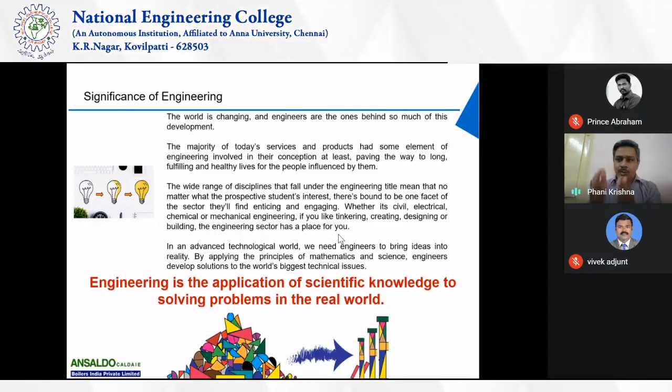So you can see one small pictographic image in my slide here, where there is so much of ideas - you can see the triangles, rectangles in this one. And when we put it into small vertical portions, beautifully constructed into a vertical structure, that can be done by an engineer. You can see how I want to present the concept of engineering to you.

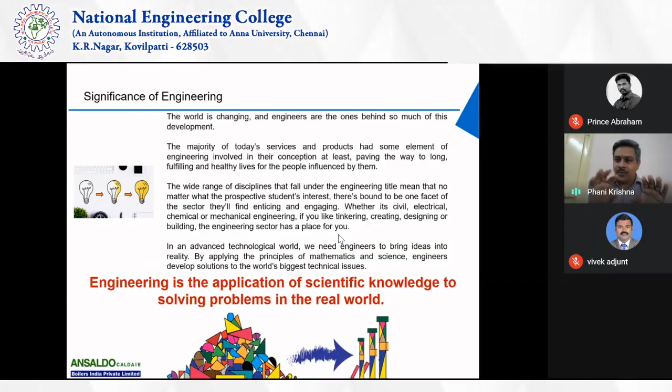Science and engineering - many people are familiar with the very big scientist in the world, Albert Einstein. Once he said: scientists investigate that which already exists, but engineers create that which has never been. You should appreciate this fact.

Take science - if you have electromagnetic radiation, there will be a lot of studies and research done by scientists. But the development of a radio, a TV, or high-class monitors, and how people communicate with each other using these kinds of devices, are built by engineers. So the concepts which are all transformed into realities are maintained only by the engineers.

The engineering portfolio knows no bounds - in the sense there are a vast number of facilities and options available in engineering based on students' own interests. But all these people are working toward a common goal, which is building a sustainable world - a world where all human beings living with nature will have harmony and balance.

Our engineering dedication - nothing compares to the knowledge that you have achieved something that impacts people's lives for the better. That is why engineering is so important in everyone's life.

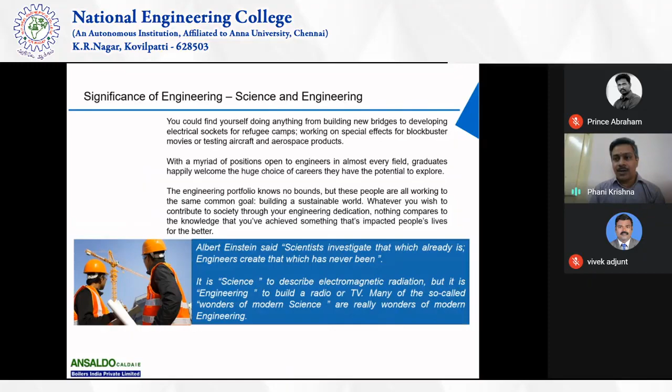Now, what is the impact of engineering on society? In fact, engineers have completely changed the world we live in - from modern homes, bridges, space travel, cars, and the latest mobile technology. Everywhere, everything we see around us, what we hear, listen to, feel, smell - the fragrance we experience - everything is related to engineering. Everything is built by engineers.

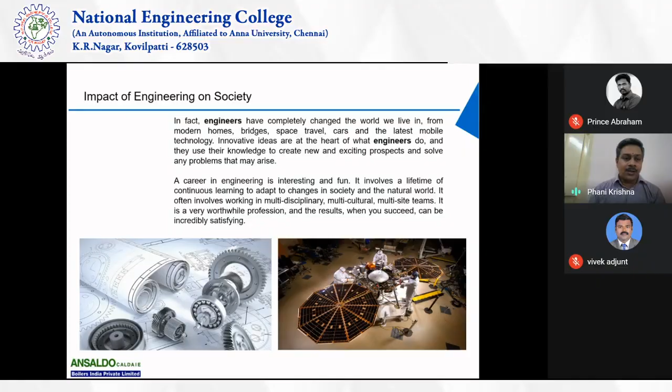A career in engineering is interesting and fun. It involves a lifetime of continuous learning to adapt to changes in society and the natural world. It often involves working in multidisciplinary, multicultural, multi-site teams. What does that mean - multicultural, multi-site, and multidisciplinary?

A small item cannot be built by only one person. It takes a team of people to come together, and then the concept of this idea comes into reality. That means a large number of people join as a team. Everybody may not know everything - some of us have some ideas, some experience, some knowledge. Someone will have additional knowledge which we don't have. So all these people come together and make things happen.

That is engineering - when we work in such an environment, we have a lot of interesting experiences. We know each other, we know many people, and many different kinds of understanding develop between each other.

Multicultural in the sense that as an engineer, we have a lot of opportunities to travel to many countries and cities across the world - to work in their systems, their projects, to train in their designs, concepts, and factories. While working and traveling to their countries, or while they come to our country, we have a lot of exchanges between ourselves and get to know each other a lot. That is how cultural development between people happens.

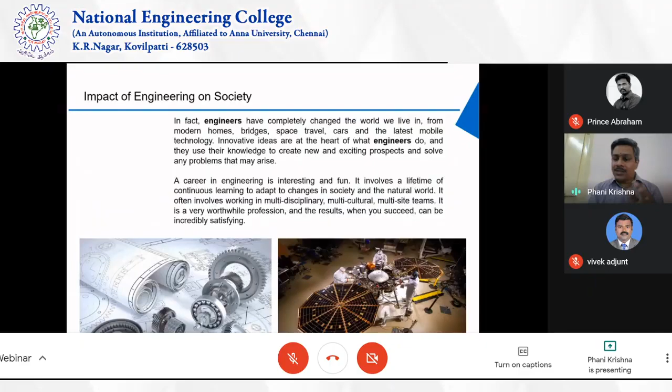In the previous slide we saw the impact of engineering on society, and now we will look at a few lines about why engineering is important to society. Earlier we saw the impact - now we will see why engineering is important.

Engineering is a field in which scientific knowledge and mathematics are used and applied to develop ways that benefit mankind, making it extremely important to society in several reasons. There are a lot of issues and problems that we have adopted and live with in daily life. When we have engineers around us, with good thinking and a development background in engineering, we can find solutions. We can give solutions, we can find solutions - we can provide those solutions because of engineers.

Engineering encompasses a whole range of industries that could include on-site practical construction work as well as evaluating safety systems from an office. They use the knowledge they have within a specific industry in order to make things work and solve problems, whether this be transport, medicine, entertainment, space, or environment. Wherever, whatever, and whichever point you take it, engineers must be available to solve their solutions.

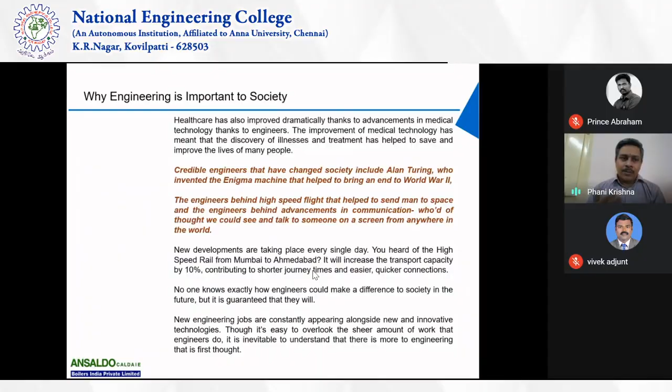In this technological age, the use and effects of engineering have become more and more apparent in our everyday lives, from our cell phones to the use of advanced transportation around the world, elucidating the growing dependency on the creative development work done by engineers.

This dependency on engineering dates as far back as the Roman Empire, as there was a great need of engineering to make lavish temples, structures for emperors, or walls for protection from outside threats.

The use of engineering in today's world has come with positive effects, as we are able to live comfortable and pleasant lives due to the advancement of building techniques and technologies created through engineering.

One of our big temples, the Tanjore big temple, temples in Bangalore, or big temples on the north side, or big churches - consider how they were built, and the engineers behind that.

Even though we didn't have the high technologies we have today, in earlier times they developed their calculations and put them into practice, building such beautiful, magnificent structures, which have all become identities of our country in the world because of the engineers.

Engineering has many names and different forms, but each branch holds positive effects that benefit human society and the world.

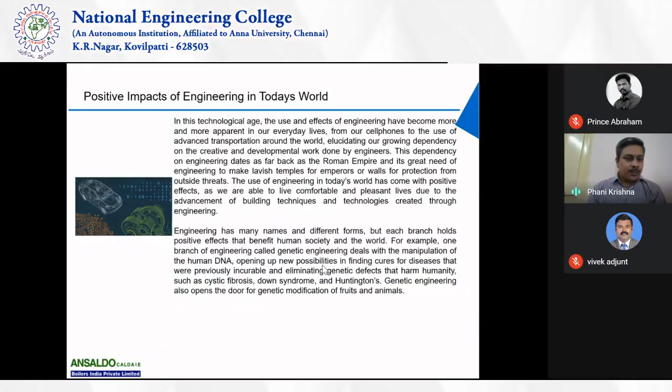And Huntington's disease. Genetic engineering also opens the door to genetic modification of fruits and animals.

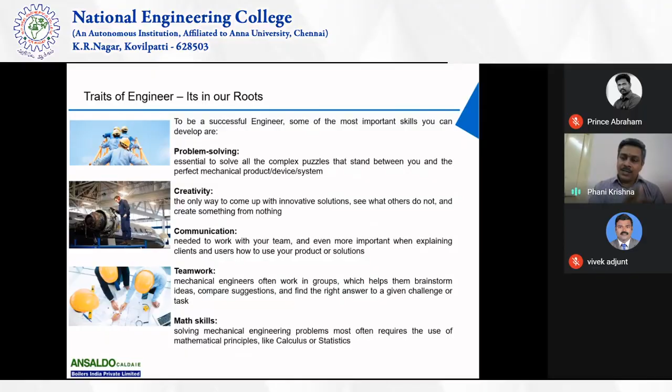Now, start now itself - it is in your hands. Start gaining experience as an engineer early. But you know what employers value even more? That means before graduation completes itself, employers - the job providers - expect some experience, hardcore hands-on experience. That means you can work on it.

It's within your home. How is steam developed while cooking in a pressure cooker? When the whistle comes up, how does the steam come through the small nozzle? Why is there a small gasket inside the pressure cooker? It is in everybody's home - you can see what the gasket will do. Without a gasket, what will happen? With a gasket, what will happen? Of course there is some danger, so let us not do it.

Start developing your mechanical engineering skills by doing internships, taking volunteer work, or shadowing professionals during your time. You will have the best chance to not only graduate with a great degree, but also with practical insights on how to get the job done. Consider this as an investment - see how you offer your time now, so you could exchange it later for money, power, and world domination.

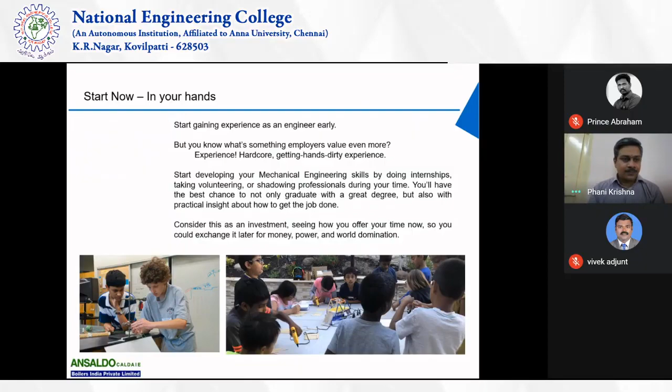Now, this slide I kept here to explain how I became an engineer, how I've been benefited, and how I have been working all along in this engineering field without deviating from my mechanical core principles. I'm a postgraduate with almost 18 years of experience in various thermal engineering aspects.

I had the opportunity to travel to a large number of countries in Europe - France, Belgium, Germany, South Korea, China, Luxembourg, Austria. So many countries I traveled because of being an engineer. I'm afraid if I were not an engineer, I may not have been able to travel. Of course, there are also chances in other fields, but as an engineer, I traveled a lot because of this.

The opportunities for visiting and working with other geographical nations gives confidence and strength in you. Meeting with big plants, precision parts manufacturers, renowned contractors, and many more naturally gives a great feeling of achievement. Few industrial boilers, design and engineer, air pollution control systems, piping, water and steam engineering is my core expertise, and I have developed this information, these concepts, these skills over a period of time.

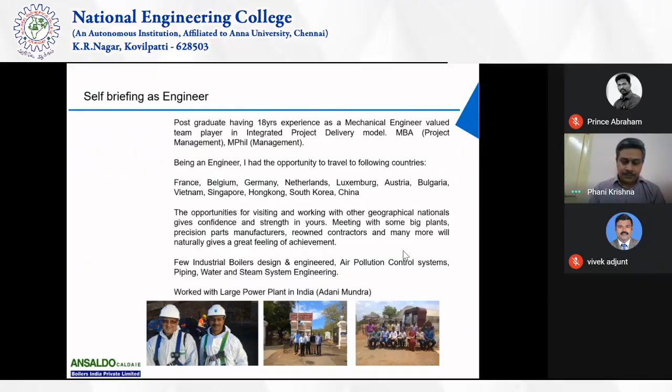Now, these are some of the pictures I captured firsthand when I traveled in Europe and many other countries. This is one of the largest power plants, one of the few big power plants in India where we have worked. You can see how a large scale project looks like. That gives a complete, happy, satisfying feeling as an engineer.

When you are seeing the structures, when you are seeing how the equipment, how the systems are developed, how the products that you designed in your office have become a reality.

This is one of the pictures during the construction phase. And when you see such a construction phase becoming reality and operation, such a big plant - this is one of the 800 megawatt plants outside India - you will feel very satisfied by selecting this as an engineering discipline.

So, becoming an engineer is one of the greatest opportunities and also a big option to consider. With this slide, I thank you very much, and I wish you all the best for taking engineering as a core subject or core discipline for your career. Thank you.

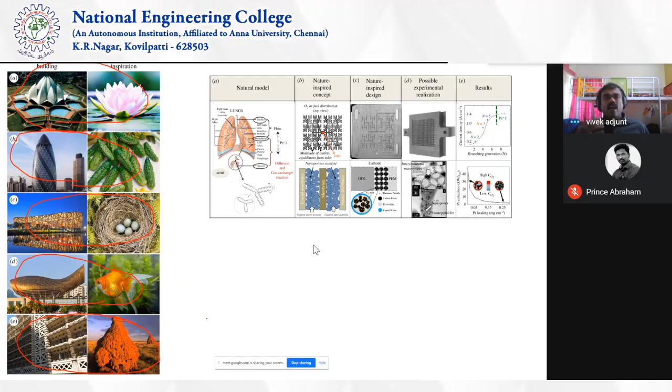Whereas our lungs is a very small portion which do at least 10 times more job than the AC.